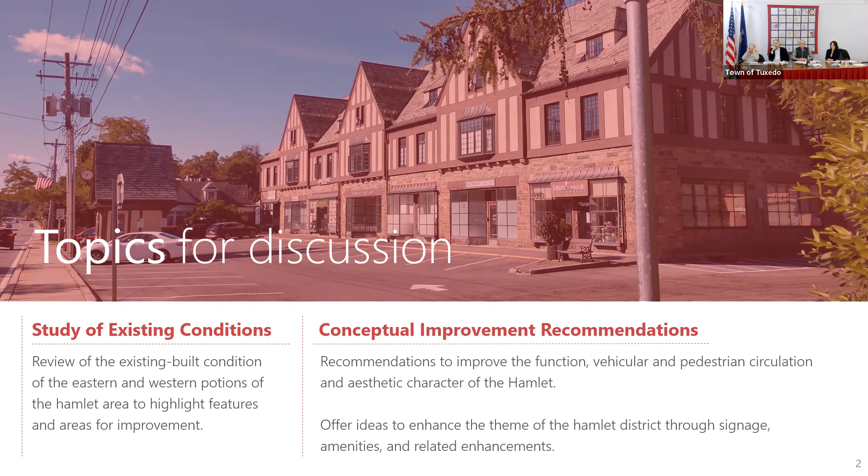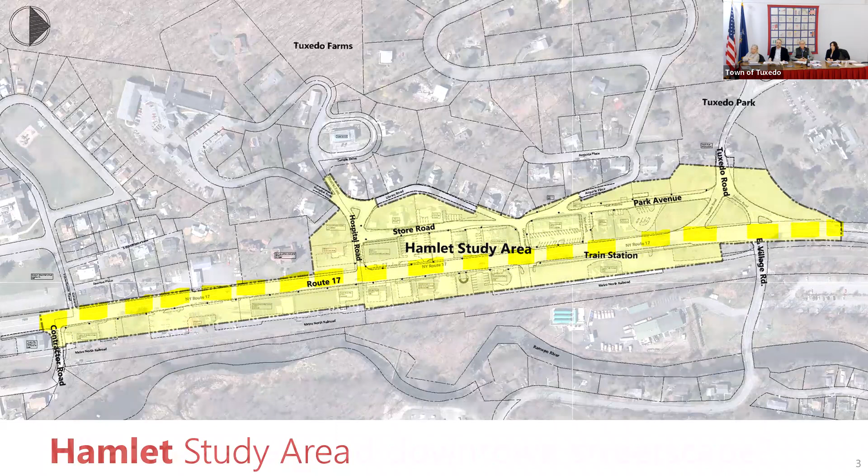What just came up on the screen a moment ago is actually Route 17's corridor, which runs down the central spine of the district, just so for orientation purposes.

So what makes a good downtown streetscape? There are many different ingredients that go into that, such as sidewalks, public space, circulation, street furniture, aesthetic features, outdoor dining, signage, transit, and lighting, amongst others. All these features are important considerations when you look at a downtown streetscape, and you try to encourage these features to improve the function, aesthetics, and interest of the downtown corridor.

I think that's one thing we may be missing in our downtown—and I refer to it as our downtown because we like to take ownership of this overall scope—the downtown itself is a sort of polished gem in my mind. It has a lot of architectural interest. It has a substantial amount of traffic running through it, and I think that can be captured through features and improvements in your streetscape.

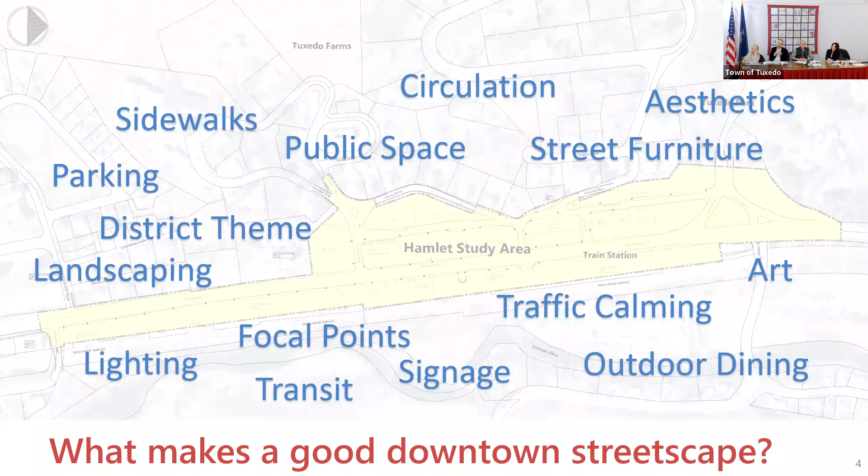Study of some of the existing conditions. This is a series of maps that I'll show you, highlighting various areas to help you understand what we were looking at and how those improvements... excuse me, I'm sorry. I'm trying to do this all from the larger screen because the smaller screen didn't work, but bear with me a second.

Okay, so first I'm going to zoom in on Park Avenue at its intersection with Tuxedo Road. What you're seeing here is the existing Park Avenue roadway, which is a sub-street, as I call it, of Route 17. As many of you know, you can actually circulate to many of your buildings along Route 17 without actually having to go onto Route 17. We became aware of that, and it became a substantial feature that I think you can enhance in your downtown.

Because Route 17 has its limitations as to traffic and volume of circulation that occurs in that area, what we're offering tonight is ways to improve Park Avenue as well as Store Road as other sub-streets of your downtown area. That allows for greater circulation and movement within the downtown, and ways of getting around instead of always having to go out to Route 17 for circulation, at least in that westerly portion of the district.

What you're seeing on the right-hand side is Tuxedo Road and its intersection. We identified some of the features—obviously there's a culvert coming from Tuxedo Park itself down through towards Route 17, eventually making its way to the Ramapo River. Vehicular circulation currently is utilizing Park Avenue.

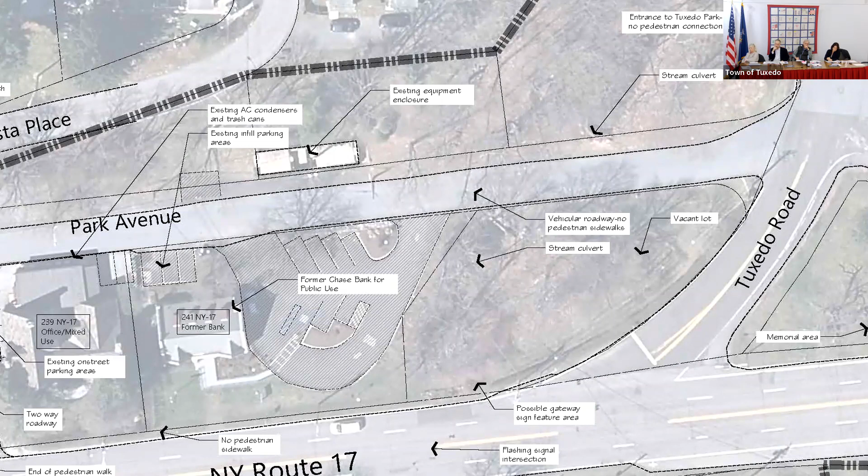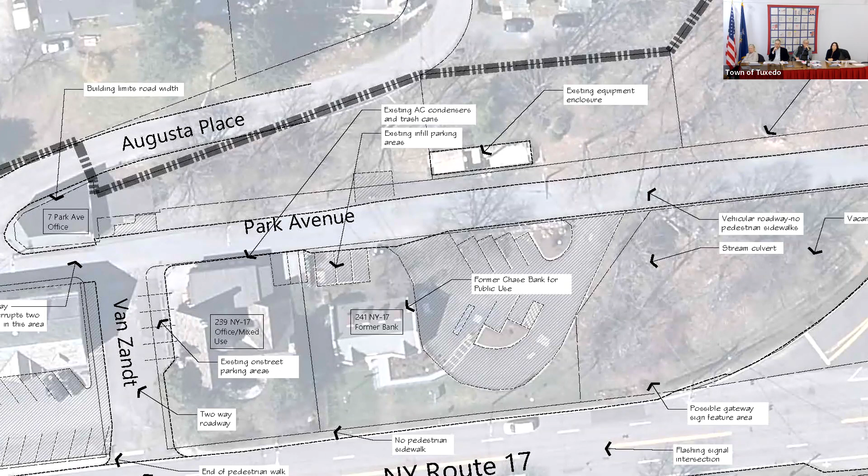I'm now moving south along Park Avenue to show some of the other intersecting streets—we have Van Zandt, and then Augusta Place. As I mentioned a moment ago, and I'm going to move my mouse to approximately the location, you have here where two existing buildings are in close proximity to one another, creating virtually a one-way driveway. That one-way driveway—there's no way of changing that because of the physical limitations in that area, with the exception of adjacent building improvements.

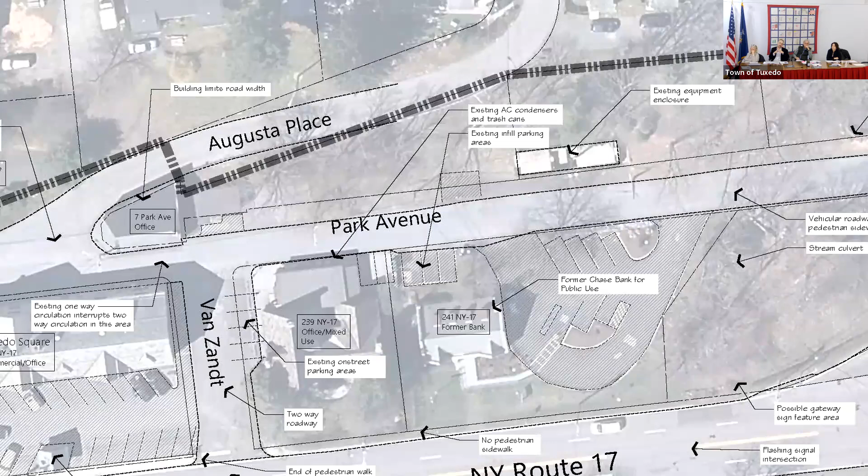Instead of recommending anything so drastic, what we're looking at, and what you'll see in some of the concepts we pursued, was ways to work with that and to realize that up to Van Zandt, Park Avenue may be a one-way circulation aisle, but at Van Zandt itself it's already an existing two-way circulation aisle, providing access to properties to the south. You have Tuxedo Square, and then circulation to Park Avenue itself. We look to maintain that two-way circulation and try to enhance it along Van Zandt.

That choke point at Augusta Place is also complicated by Augusta Place coming down to Park Avenue in a non-90-degree circulation pattern. That creates a confusing intersection for those new to the area, especially trying to get to Tuxedo Square. Say you turn at the light at Route 17 south of this image, then turn towards Augusta Place - it becomes a question of which way to go and who has the right of way. I think that can be improved through striping and other opportunities in that area.

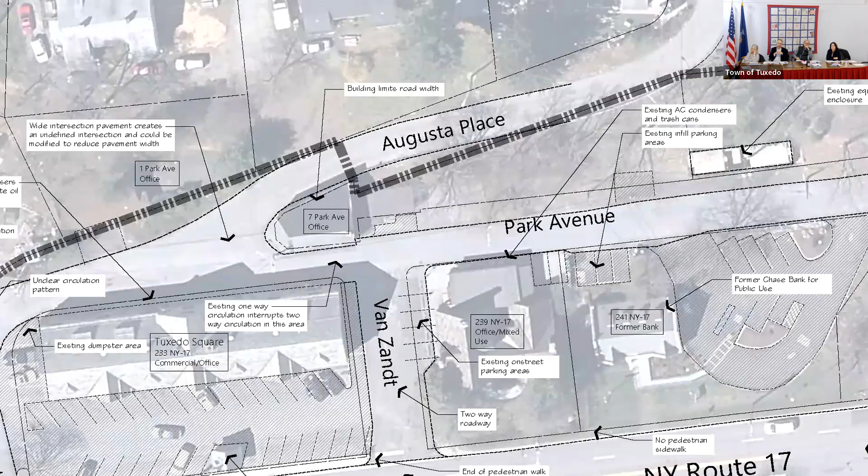We also have areas to the back of Tuxedo Square - you have your AC condensers and waste containers for the function of the overall building. The building has been positioned this way for many years, so there's only so many ways to make improvements to that area to allow vehicular circulation, thinking about the general public coming to businesses in the future, and looking at ways to aesthetically enhance those back areas of buildings.

You also have Library Road intersecting with Augusta Place, and as Library Road curves towards the south, that intersection itself is rather large and undefined. I think with striping and some minor improvements to that intersection, we can make it much more attractive, as well as easy to understand for a newcomer to this area.

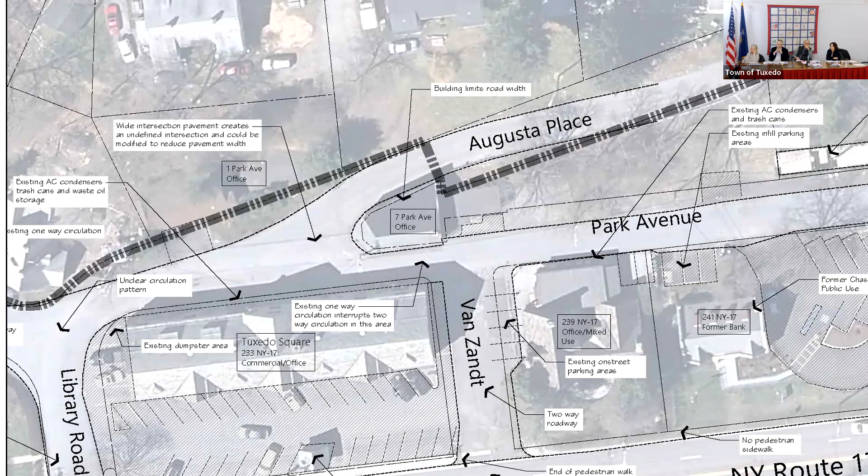Sorry, I'm just circulating around.

As you'll see on the same map, this is the existing conditions analysis. You obviously have at Library Road a full vehicular circulation signal. That provides two things - vehicular circulation at that point, but also an opportunity for pedestrians to cross the roadway. Route 17 is obvious to many here that it's very difficult to cross if you're not at the signals themselves, being a 4-lane roadway.

Van Zandt itself is unsignalized. You do have the flashing light further down the roadway, but there's no direct pedestrian connection to the train station other than at Library Road.

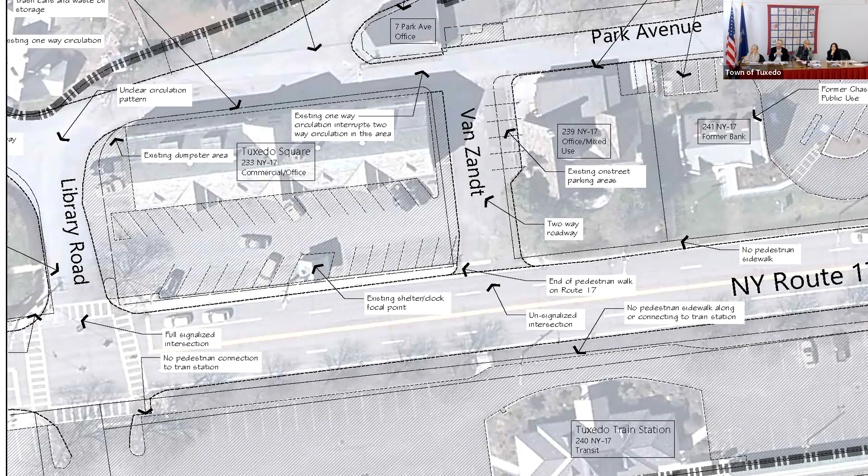We also looked at the train station itself, and what's interesting is that there are no sidewalks from Library Road's intersection to the front entrance and overall train station area - it's all vehicular circulation. We noticed the asphalt area for the parking lot is rather large; the aisle width itself is larger than it needs to be for a 90-degree circulation pattern.

What that offers is an opportunity. We're looking for ways to make small incremental improvements to improve circulation and enhance the overall downtown area. So that became apparent to us as we looked at the overall property.

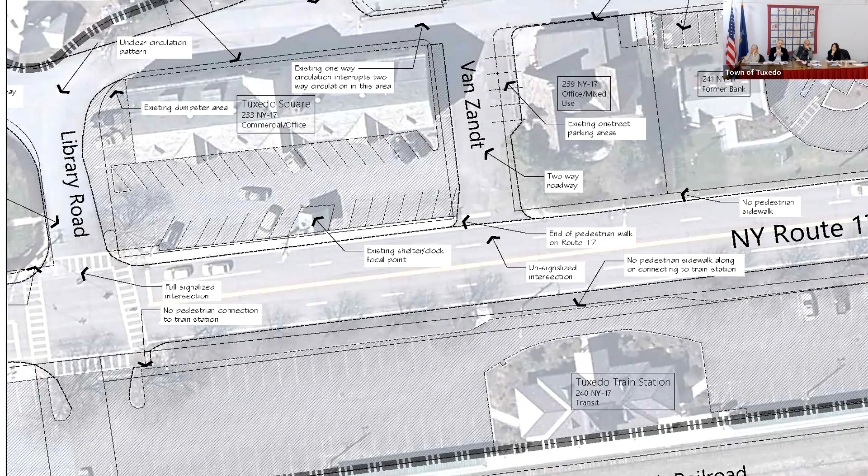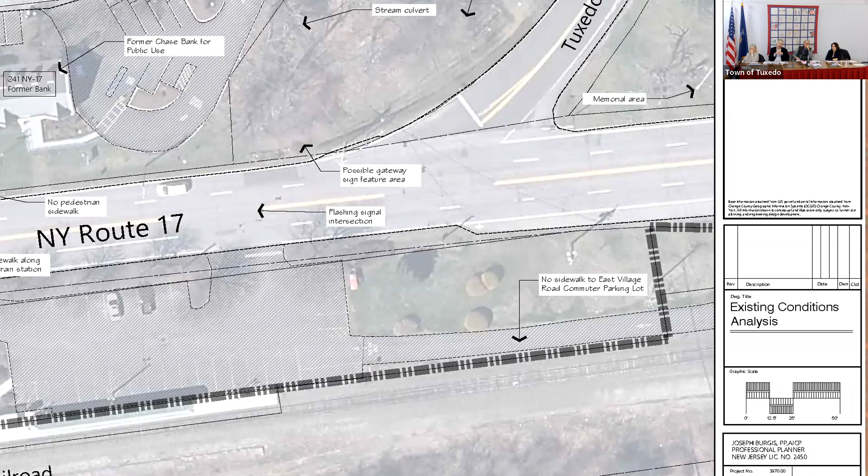In addition, looking further north at the drive that comes from the East Village Road area, there is no pedestrian connection from the park and ride facility - it's further down the hill. I think that's another opportunity we could look at to make that improvement as well.

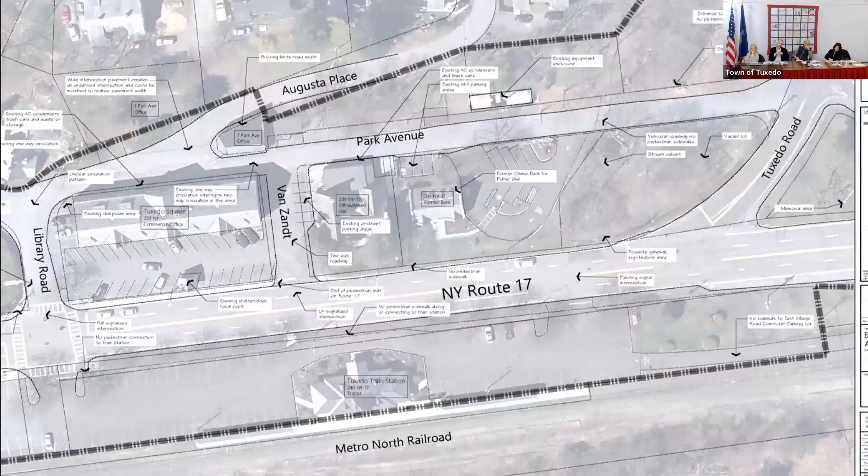What I've just advanced to is another existing conditions map that we prepared, and again I will look to zoom in on this as well.

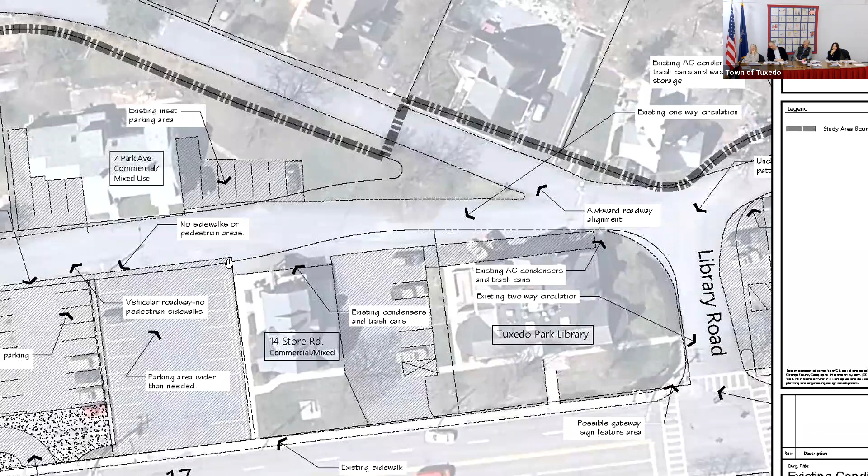You have existing air conditioning condensers, trash cans, things of that nature that also exist in this area. You have large open parking areas that dimensionally are larger than they need to be for some of the existing commercial properties. I think that represents a possible opportunity for the commercial properties themselves.

You have the intersection of Store Road and Hospital Road off to the left-hand side. It's a rather wide, undifferentiated intersection, probably evolved over time as the appropriate ways to address circulation. I think we have the opportunity to rethink those intersections and make improvements to them as well.

You have some wide driveway areas, and again, lack of pedestrian circulation in the back areas of the buildings. I think that's another opportunity that allows this interconnection between properties and buildings.

At the intersection of Hospital Road and Route 17, the exit area from the existing commercial property at that corner is again a large, undifferentiated intersection. I think that might also represent another opportunity.

What we also looked at in the downtown streetscape is ways to try to identify and highlight these intersections, to highlight that you're in a specific district. You do that through signage, landscaping, and pedestrian improvements that draw potential patrons to the area, so they can use it and possibly walk from business to business to frequent the storefronts. That was a main focus of what we tried to capture within the downtown area.

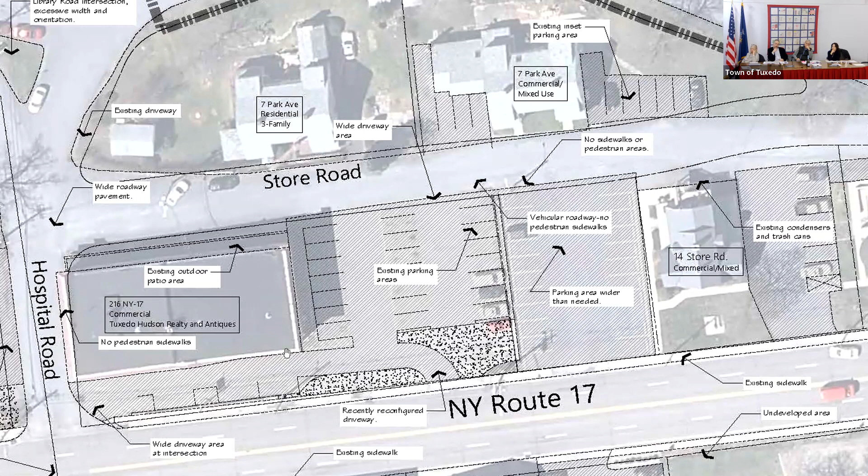On the easterly side of Route 17, you have existing sidewalk areas that have been recently improved. Unfortunately, there are no landscape features along that area. It's rather large sidewalks, all concrete, with no street trees.

We've had a lot of experience and success in downtowns where if you add street lights and street trees along your corridors, it adds a thematic element to your downtown area, so people know that they're entering a downtown. It doesn't feel so much like a highway. That's another thing we're looking to explore as well.

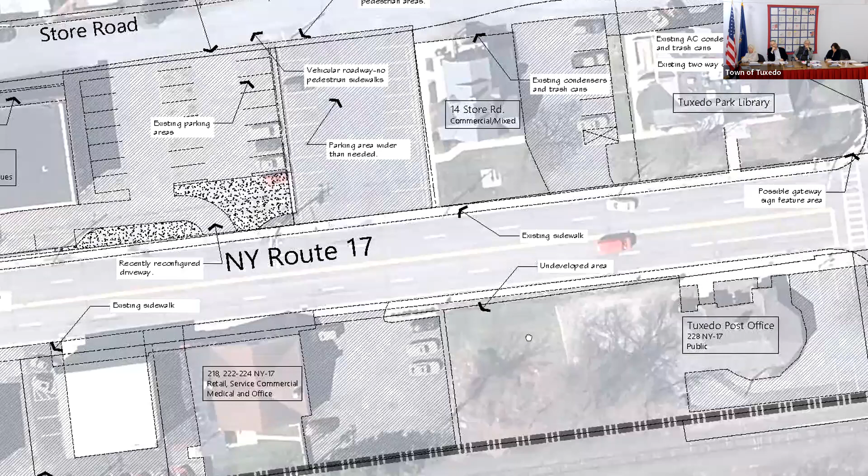Adjacent to the post office in this illustration, you see a large green space area. It's a rather unimproved area that I think represents a possible opportunity next to the post office - this is the post office to the right-hand side. So we identified that as well.

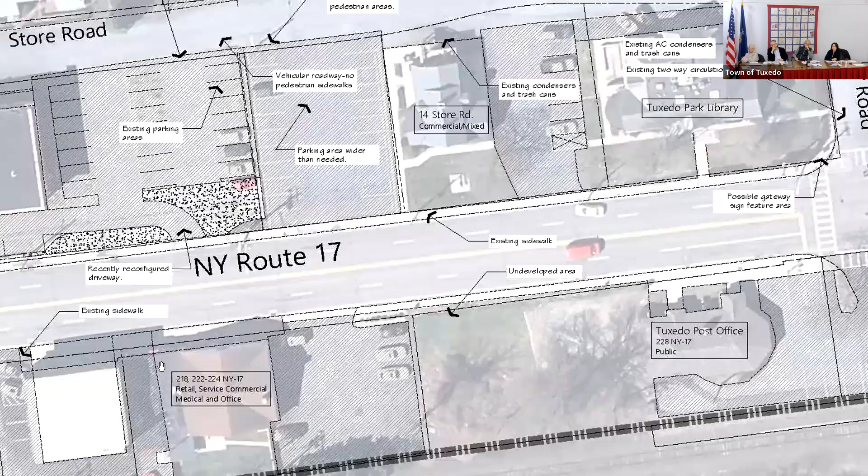Additionally, we looked at other adjacent buildings on the easterly side of Route 17 and noticed there are a lot of more light industrial, some warehousing type structures along that area. They represent some elements of commerce, but at the same time, some of the buildings could benefit from certain improvements. We looked at the existing warehouse at the opposite side of Hospital Road on the easterly side.

You have large blank walls where the windows have been filled in. You'll see some ideas in a moment of how to possibly treat that in a very simple way, capturing ideas of what other downtowns have done with walls such as that, to make them interesting and draw attention to your downtown, making it a point of interest for people passing through.

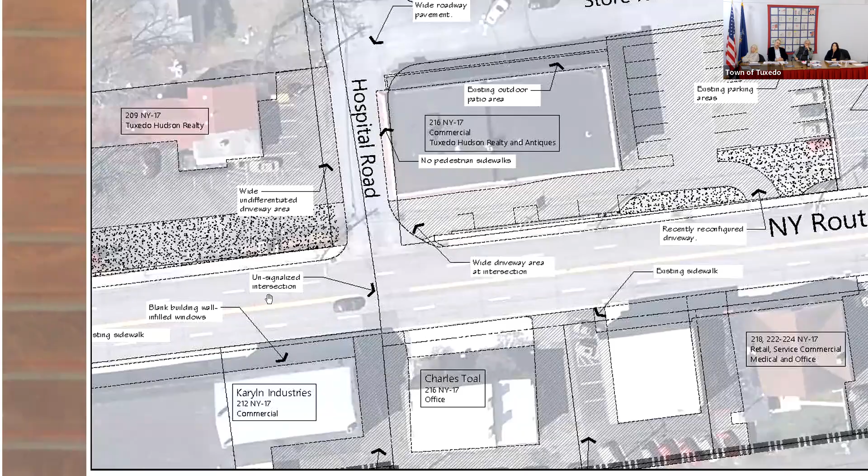I'm now transitioning further south, since part of our study area also included additional area to the east, towards the south. I wanted to show that at least in this location, this is an unsignalized intersection. As Ms. Murphy mentioned a moment ago, there's an opportunity to talk to DOT about another pedestrian crossing location here.

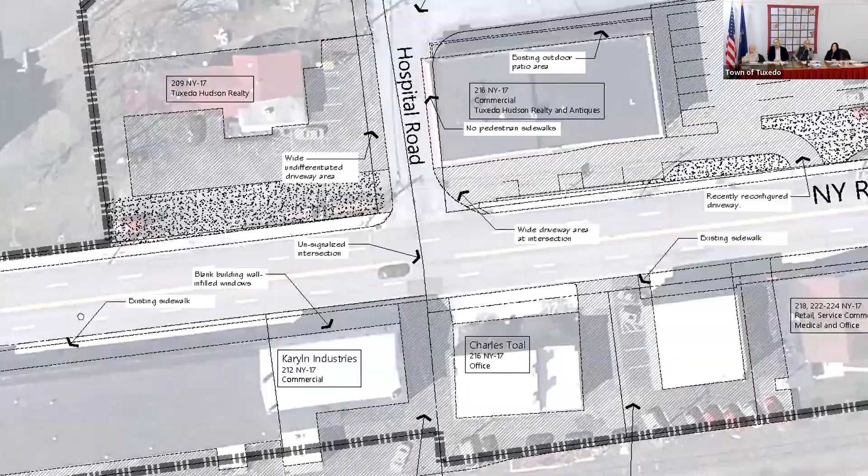We also looked at the sidewalks in the areas along adjacent properties towards the south. I'll point to a driveway that services some of the other adjacent businesses. Those driveways are available and open, but the existing sidewalks are somewhat interrupted by the driveways themselves.

What we try to do in downtown streetscapes that have been improved further to the north is use concrete or pavers at crossings of driveways. It allows pedestrians to feel safer walking along the streetscape, and lets vehicular drivers entering and exiting those driveways be aware that it's a pedestrian zone. You'll see some ideas to recommend improvements to those areas.

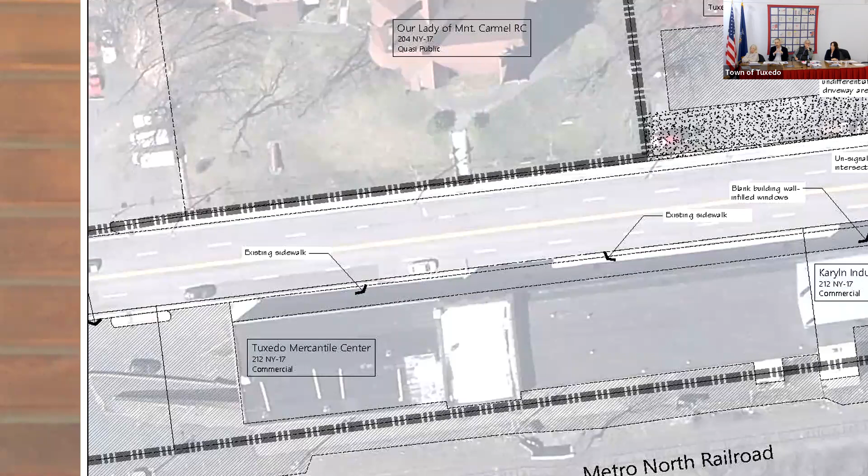What I just transitioned to is the southerly area of the downtown area, and I wanted to zoom in on this as well. Bear with me a quick second.

So what you're seeing here is where the businesses end their parking lots that exist in that area. There is a vacant portion of a lot along the streetscape, creating somewhat of what we call in the planning realm 'missing teeth.' That breaks up that element of streetscape along your corridor, and I think it's an opportunity for possible additional infill development. But of course, that all depends on economic improvements.

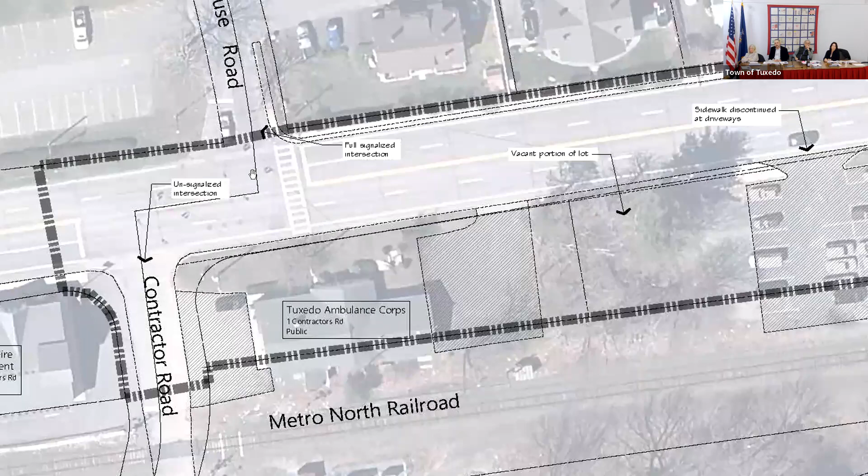You have your existing ambulance corps building, but also your existing signalized intersection in this area adjacent to Schoolhouse Road. That provides, again, another pedestrian connection on the opposite side of the streetscape.

We did take the study area to Contractor Road to see if there's any other opportunities for connectivity. I think there's a potential here where you have an undefined, large open driveway appropriate for ambulance vehicles coming in and out of the building, but maybe there's a need to connect a sidewalk and crosswalk area along that driveway.

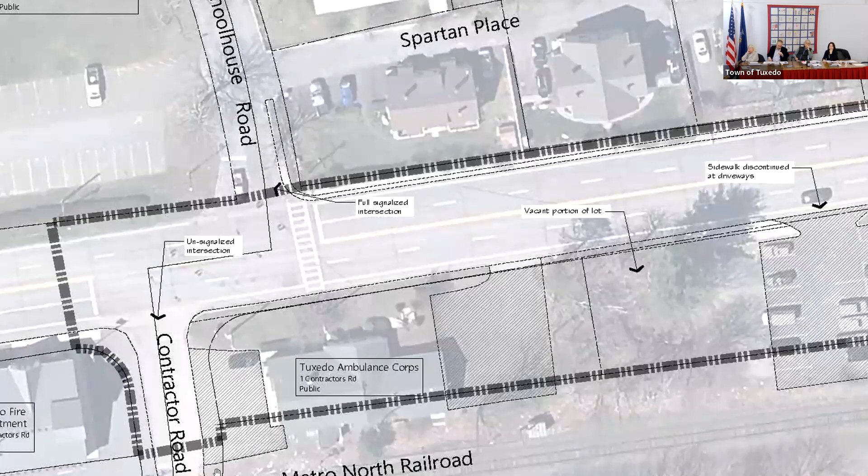So now we'll provide you with some of the conceptual improvements, from plan view. I'll go through some of these quickly since we have some simulations as well. I'll zoom in on some of the areas, but looking at Park Avenue again up in the north...

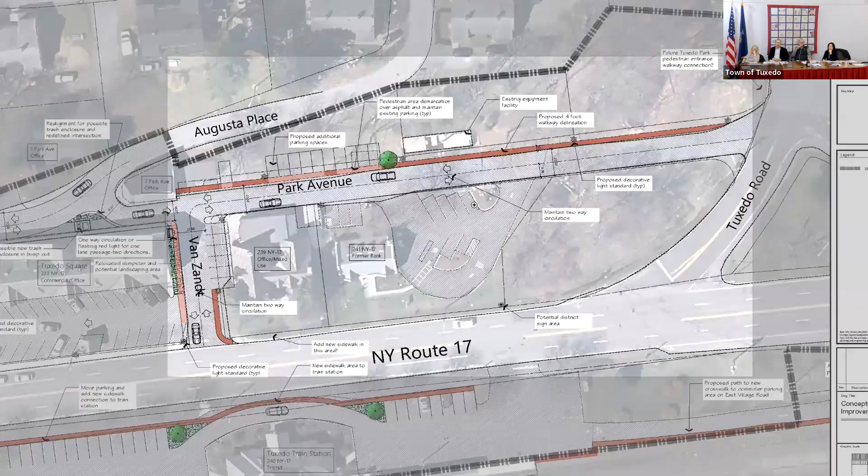What we looked at here is an overall width of about 26 feet for that roadway. I think there's an opportunity to create one lane in each direction, each about 11 or 12 feet wide, allowing for a 4-foot wide area of striped asphalt or possibly a formal sidewalk along Park Avenue. That provides connectivity to Tuxedo Park, and also a vehicular and possibly alternative access route for bicycles, so they can interconnect into the downtown area.

What you're seeing on the map as thematic elements of red and lighter red colors are areas that could be a striped area, an imprinted area with epoxy resin, or a formalized sidewalk. We wanted to identify those ideas so you can see where those opportunities could be.

In addition, we looked at adjacent property areas. There currently are some existing parking areas along Park Avenue that use Park Avenue for circulation. I think there are opportunities, if necessary, for additional parking spaces to be added in that area, recognizing that it is on adjacent property.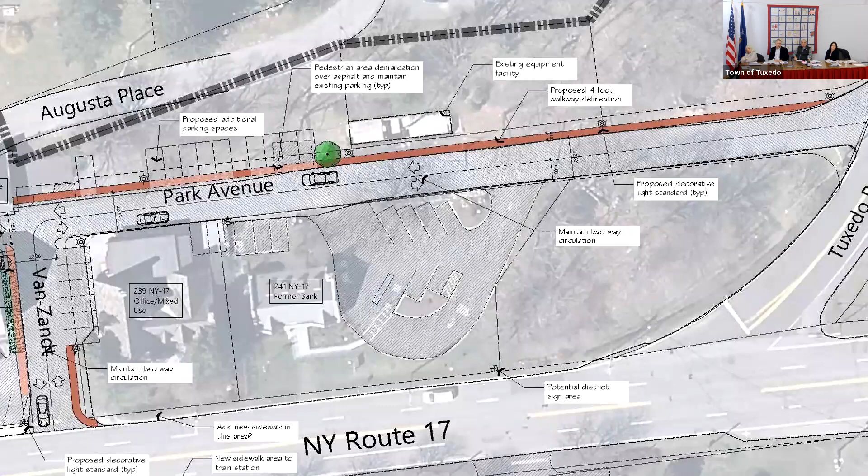On Van Zandt, I think there's an opportunity to improve the aesthetics, at least along the northerly side of the Tuxedo Square building. There are some areas with dumpsters located there that could be fenced in and enclosed, drawing attention away from them instead of drawing attention to them.

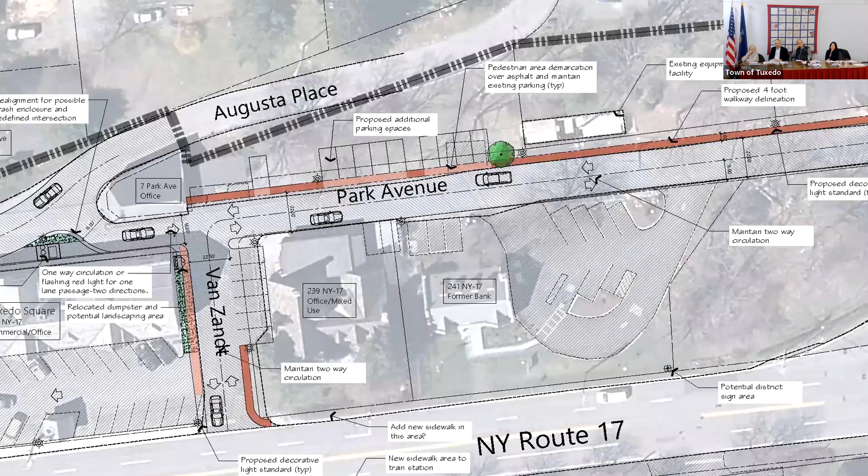Again, pedestrian circulation from Route 17 to the back areas of Park Avenue. We also looked at the intersection of Augusta Place and Park Avenue, circling that area with my mouse, and considered whether there's an opportunity to bump out the asphalt into that area.

That would be a way to try to enclose dumpsters and trash storage areas into an island, per se. That might be an area to help clean up some of the frontage along the back of Tuxedo Square.

In addition, allowing the circulation to be clarified coming down Augusta Place, allowing the flow of circulation to the intersection of Library Road to the south, but channelizing the driveway as a one-way circulation aisle to Park Avenue, still allowing that connectivity and working with the tight condition in that area. That represents an opportunity for us to explore.

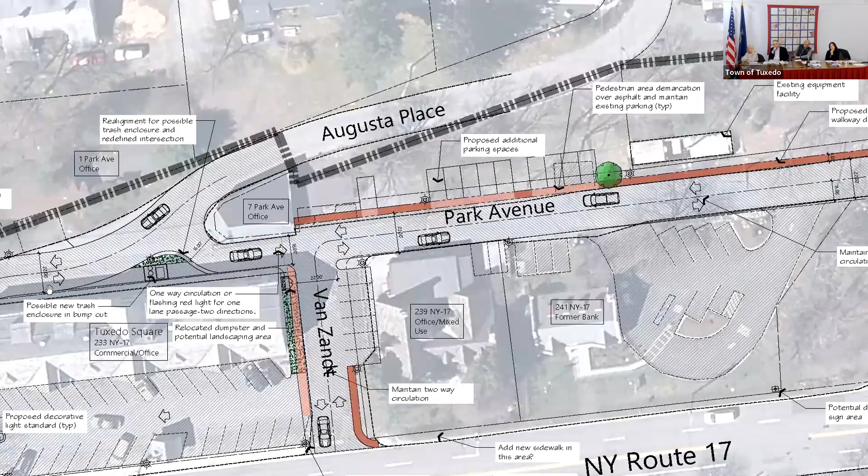In addition, the width of Augusta Place as it comes to the back of Tuxedo Square could be narrowed in some areas to improve landscaping and green space. That helps to aesthetically improve that back area so it doesn't feel like just an alleyway in back of a building.

We have some areas of dumpster enclosures that exist along the southerly portion of Tuxedo Square. There are additional areas for possible landscaping if we were to rechannelize the intersection of Library Road, again not taking away any existing parking spaces that currently occupy that area, but just trying to clean up and redefine the driveway aisle if at all possible.

Another thing we didn't quite illustrate on the plan, but I wanted to throw out there, is an opportunity. As a visitor to this area, coming from the south, to frequent for instance the convenience store in Tuxedo Square, I had to go from Library Road all the way around the building to come back around and use the parking spaces, not feeling comfortable making a left turn into Van Zandt.

Is there an opportunity to create either two-way circulation into Tuxedo Square or to redirect the circulation there? There's always two sides to that coin. If you redirect the circulation, you're sending everybody out Van Zandt to Route 17 and then around in a counterclockwise direction to Library Road to use the intersection. So there are many different ways to look at that, but that's the thinking I wanted to bring to the table: are we thinking of all these circulation patterns in the right manner?

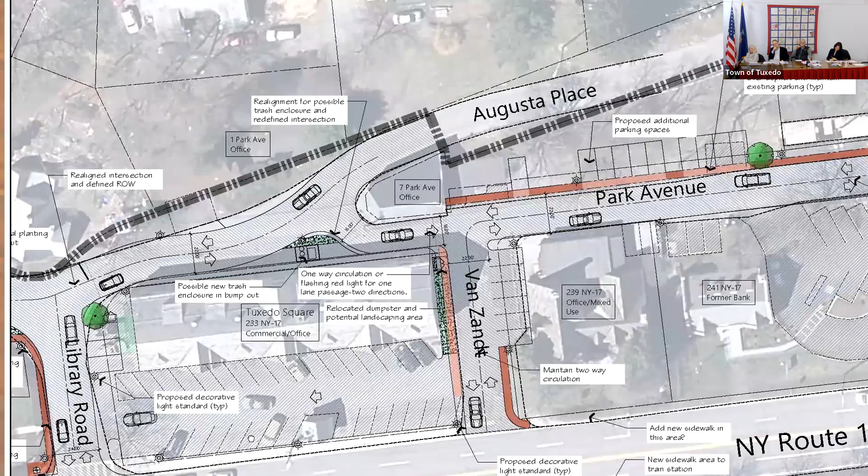In addition, as I mentioned earlier, we looked at the easterly side at the train station location. With some modifications, either through striping or reconfiguration of the existing parking, there's an opportunity to add a proposed walkway along the westerly side of that parking area as a way to connect pedestrians to the crossing at Library Road to the train station itself.

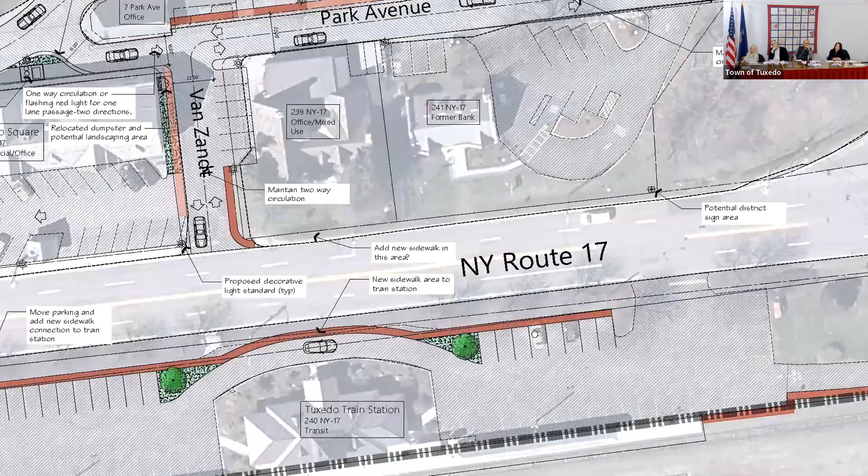I feel the access aisle or drop-off area at the train station is wide enough to allow for a one-way circulation pattern and the addition of a sidewalk area, because there is no sidewalk along this side of Route 17. That sidewalk could also be extended further north, bringing it down so pedestrians can connect to the main entrance area of the train station.

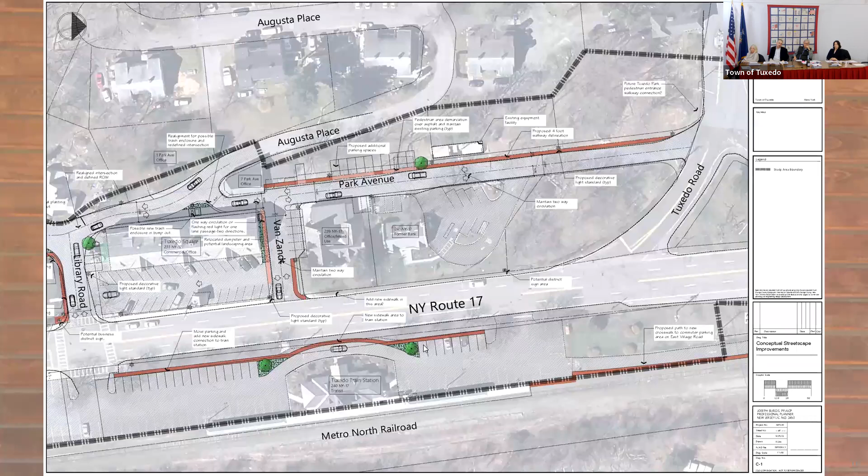So with that, that summarizes this page. I'll zoom out and go to the next series of images.

This now is another map showing an enlargement of the Store Road area. I'll zoom in on a portion so I can help you see some of the detail on the map.

This is the idea we had in mind for how we can possibly rethink Library Road, at least coming down from the south towards the north, giving a stop bar to stop that circulation, and allow Store Road to have a two-way circulation pattern to Library Road. That allows greater circulation to the parking areas and may also offer opportunities for sidewalk or imprinted crosswalk areas to be added along Store Road.

That allows for possibly additional on-street parallel parking spaces, much in the way it's used today, but formalized as parallel parking spaces.

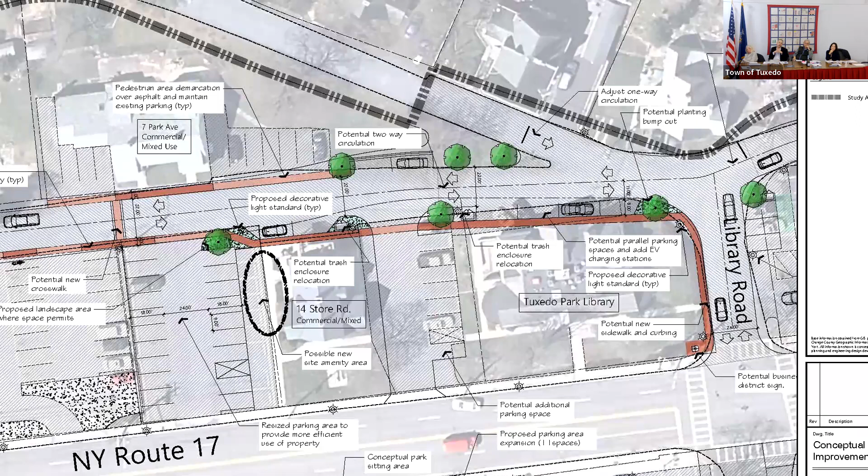Those parallel parking spaces could also be bumped out with landscaped islands to improve the streetscape condition and aesthetic. Those landscaped islands could also add additional decorative lighting to that streetscape corridor.

That decorative lighting provides for evening activities, as well as improves the time businesses can stay open, such as during the winter months, as we're experiencing now when the sun goes down so early.

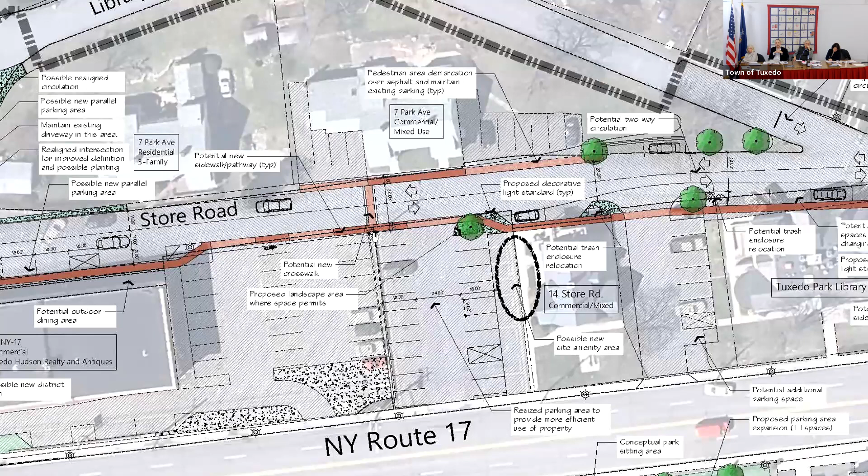In addition, we looked at ways to reconnect pedestrian connectivity - how can we connect to other businesses on either side of Store Road as well?

What you see here is the ability to extend those sidewalk areas further down towards Hospital Road. At Hospital Road, I thought that was an interesting intersection - if you are adding traffic and circulation onto Hospital Road, use it as an opportunity to create an intersection of interest.

In some downtowns, what's been done successfully by others is areas where you imprint and create a thematic intersection. That's done with either an epoxy coating of the intersection, or you could even look at reconfiguring it in some manner.

Could it be a rotary in some manner? That has to be further reviewed. But you can see here that helps to at least identify and create a point of interest for Store Road as well. So as a newcomer or a patron comes to some of the storefronts, they feel like Store Road isn't just a back road - it feels more like a streetscape.

So we're looking at ways to make these other sub-streets more interesting and usable for the businesses and downtown area. We also noticed this adjacent private property has a larger parking area with a large backup area.

If that's reconfigured to a minimum circulation aisle of 24 feet with 18-foot wide parking spaces, you have the ability to expand possibly an outdoor area or even some expansion to the adjacent commercial property, again allowing economic improvement for some of the properties themselves.

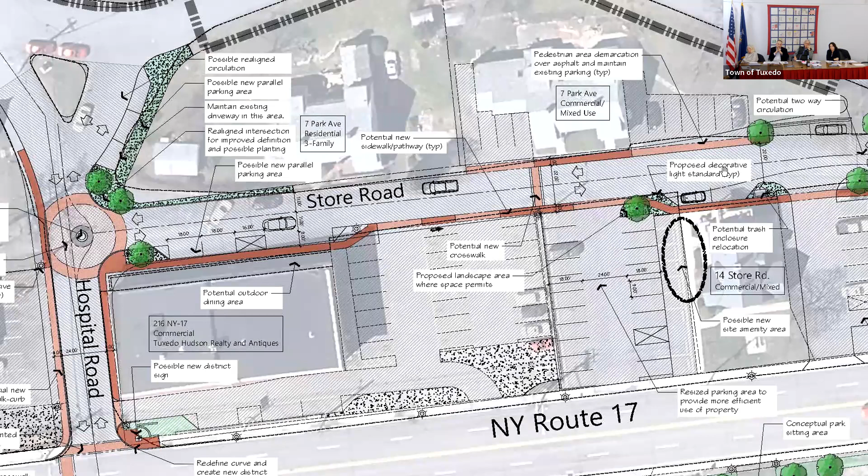What's also illustrated here as I pan towards Hospital Road's intersection with Route 17 is an opportunity with just some minor redefining of that driveway to create an entrance sign feature at that intersection.

It may require some retaining walls and features like that in order to create a level area. But with additional paving and appropriate detailing, that can really create an interesting point of view as you travel down Route 17, realizing that might be another entrance into your business district.

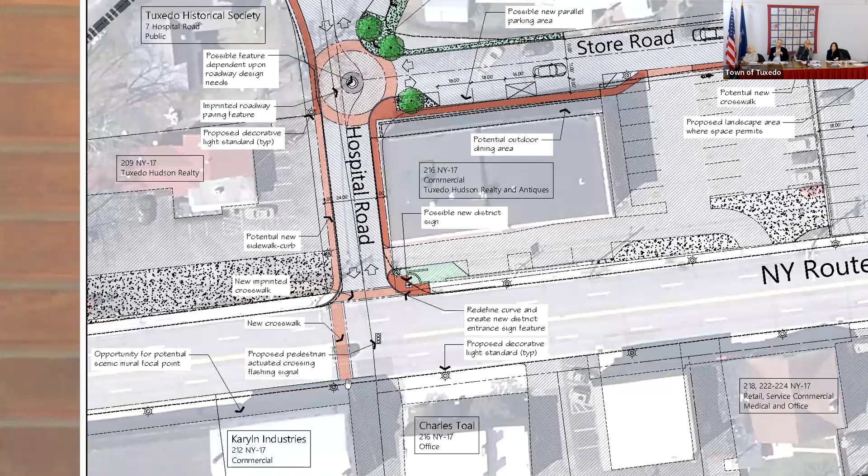In addition, you can see where we added the crosswalk idea across Route 17, with possibly a pedestrian activated signal like they have in Sloatsburg.

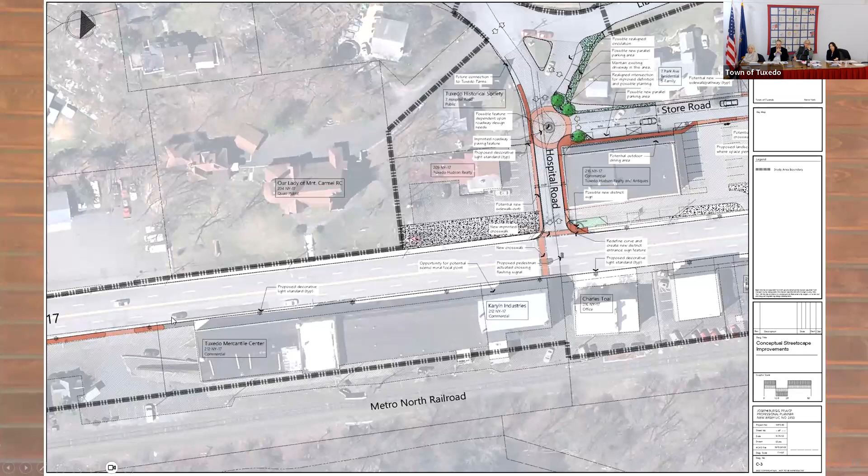And with that, I'll transition to the last page. This is generally a similar page, but you can see in the lower left-hand corner ideas of where we can extend the sidewalk across driveways in order to improve those sidewalk intersections.

You can also see further down towards the south where we've added the same patterning and details so it improves those intersections and crosswalk areas, as well as a potential crosswalk at Contractor Road, allowing greater circulation and connectivity to the areas to the south.

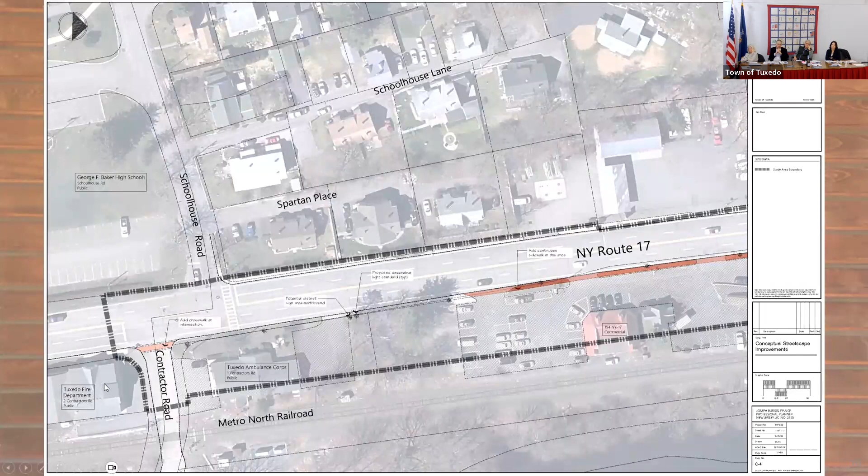Overall, with the concept sketches we've put together, what you're seeing here is additional public on-street parking areas, as well as potential off-street parking areas - 15 spaces on-street that could be captured by these improvements.

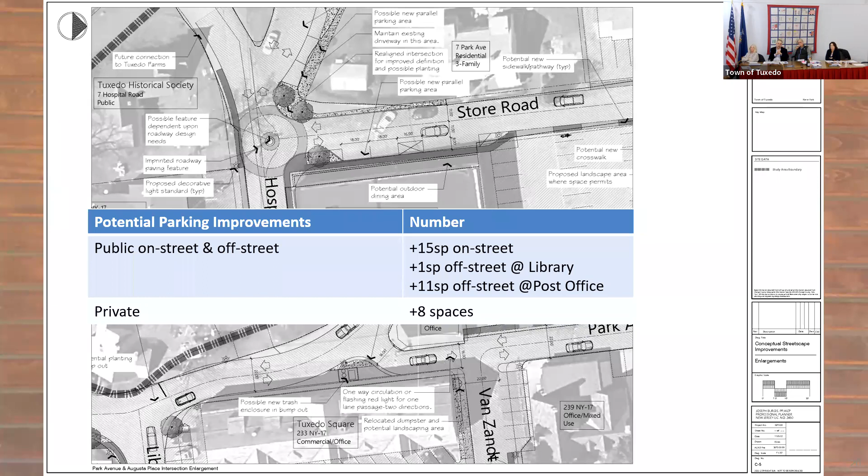In addition, you have one space added off-street and another off-street at the library itself, plus another 11 off-street parking spaces at the post office that could also be captured. I didn't quite focus on that area, but I can show you that in a moment. In addition, I've shown some possible additional parking spaces on adjacent private properties.

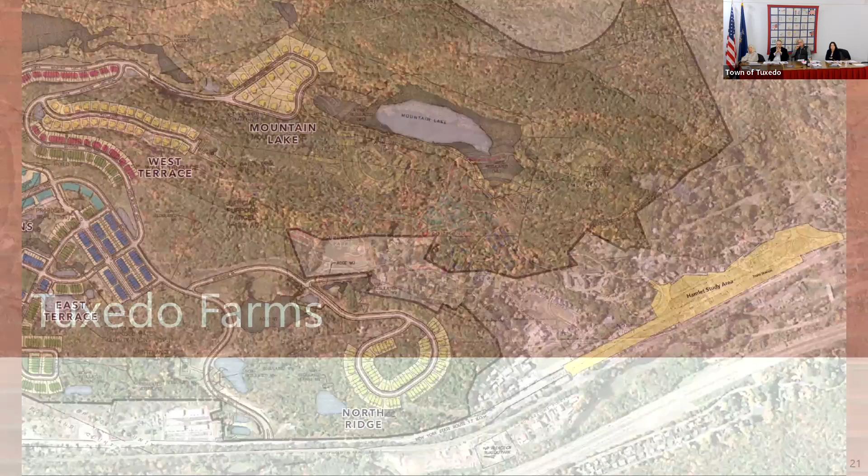We were also asked to look at Tuxedo Farms and its interface with the downtown area. Just so everybody has a reference, we downloaded the concept sketches prepared for the Tuxedo Farms area and overlaid them on an aerial photograph with the downtown hamlet area, to show that relationship between Tuxedo Farms and the hamlet.

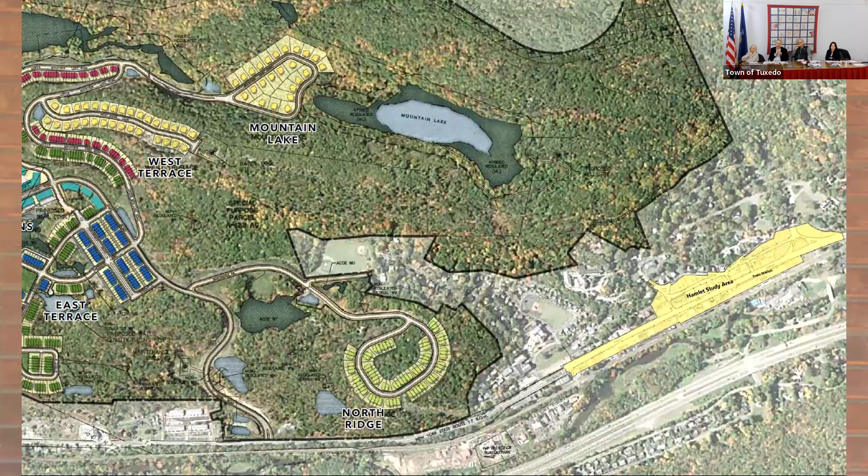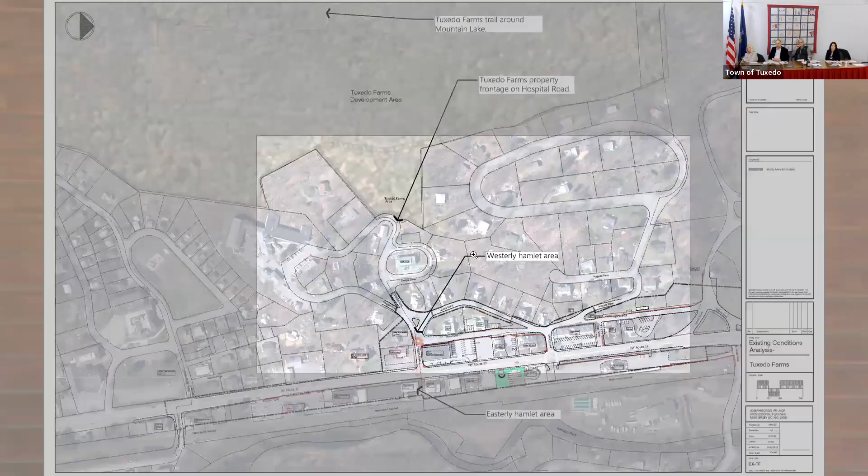We were charged with looking at opportunities, so we don't miss the chance to possibly provide a pedestrian connection between the hamlet and the overall Tuxedo Farms development. In this illustration, you'll see the connectivity here where we are right now, the town hall, which is located here, Hospital Road, and the area of Store Road I mentioned earlier.

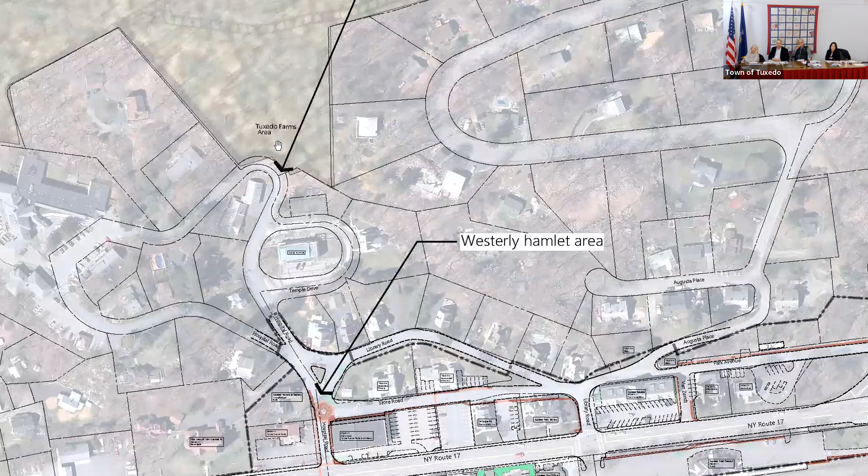Unfortunately for connectivity, the Tuxedo Farms frontage is behind the municipal town hall. It is an area we could connect to, and we could provide some connectivity through sidewalk improvements past the town hall, but it would be more like an informal trail that may connect to Tuxedo Farms.

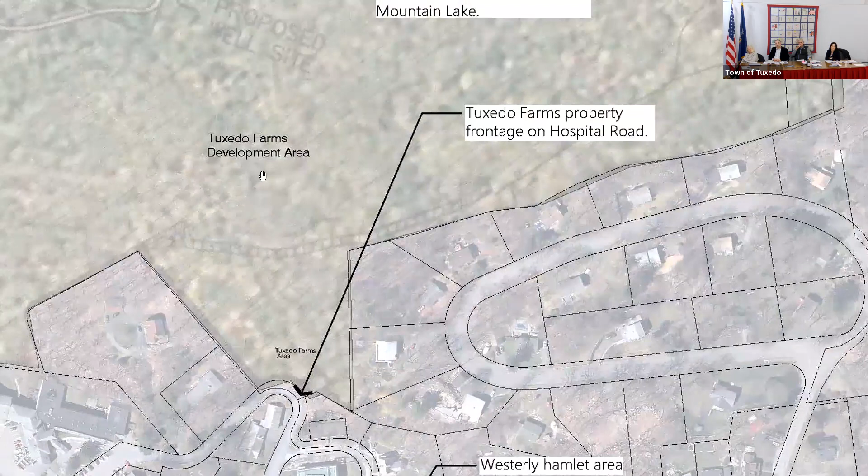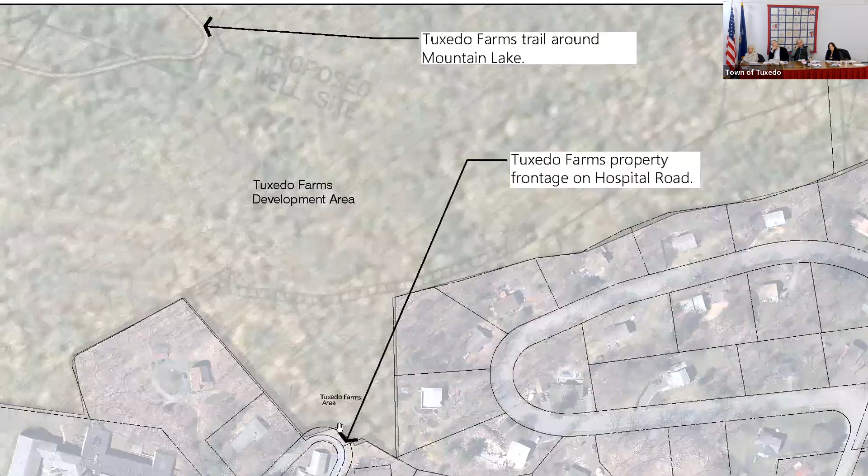As I pan to the west, the current trail system being anticipated is up in this upper area of the image, going around Mountain Lake. That's something anticipated, but there could be a spur of that trail brought in, possibly with switchbacks, because there is a grade change in this area down to the Tuxedo Hamlet area towards the east. So that's another potential opportunity we could look at.

This is another illustration showing the grade change between the Hamlet area, down in the lower portion of the image, going around the Tuxedo Town Hall, and that frontage where the grade change occurs up to the Mountain Lake area. You can see the Tuxedo Farms West Terrace area is approximately up here. I used a Google Earth image to show the topographic relief and relationship to the Hamlet area. So while it couldn't be a formalized sidewalk area, it may be an opportunity for trail connectivity, so we wouldn't miss that chance to allow at least some connection to the downtown area.

Now going back to downtown and some of the streetscape areas, we wanted to show some visual simulations, taking photographs and overlaying what it might look like with certain improvements. This is looking north on Park Avenue, showing the existing conditions, the drive condition, the roadway width, and some adjacent parking areas.

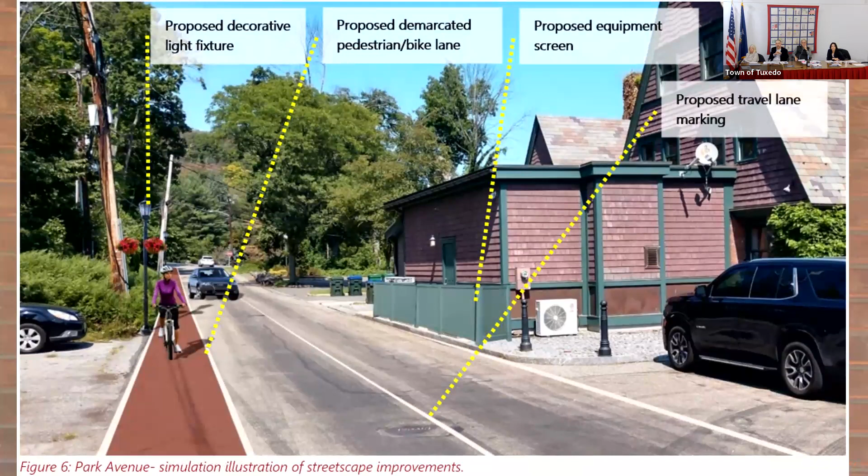You also have the back of house or back of building conditions - air conditioners, trash cans, trash receptacles - all appropriate things that need to be thought about, but could there be ways through improvements to offer screening around those features? Through screening and other roadway improvements, there's the ability to add pedestrian realm or possible bike lanes along Park Avenue, as well as streetlights to add aesthetics to that streetscape area. These simple techniques or tools could go a long way to improve the visual image and functionality of those areas.

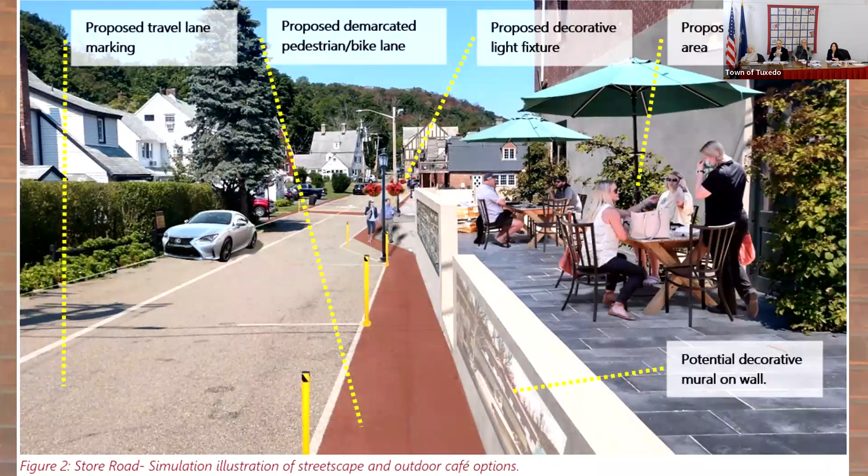Another simulation we did was further down on Store Road - is there an opportunity to offer on-street parking, possibly two-way circulation aisles, pedestrian realm sidewalk areas, and utilize the existing walls for possible murals and decorative features to enhance the streetscape? In addition, add decorative streetlights for amenities along the streetscape. Is there an opportunity in the back of the building to add outdoor dining? That's another possible way to add activity and vibrancy to the downtown.

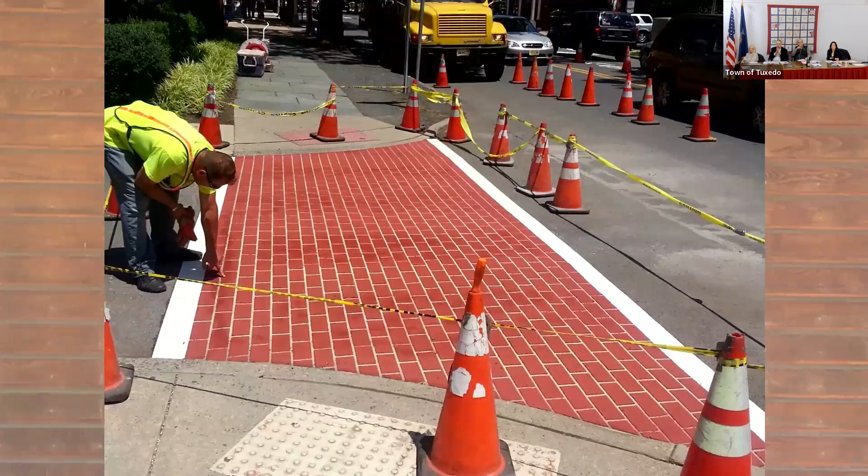In addition, the conceptual report shows some streetscape details. You have many nice historic features downtown that I think we can capture on. What I'm showing here is from downtown Princeton, where they've used imprint material to highlight crosswalks, showing how the roadway itself can be painted and even imprinted with material that cars can drive over and snow plows can plow over. This is accepted by New York DOT as an appropriate treatment over asphalt surfaces, just to show how it's been applied and utilized in other locations.

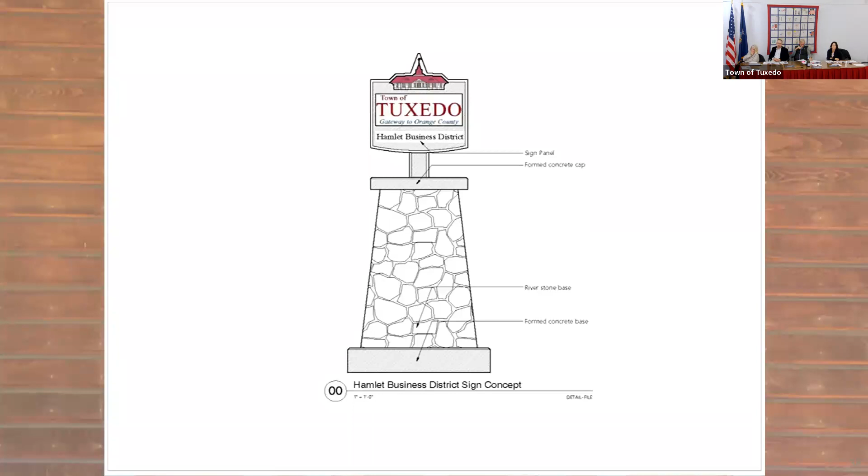A quick idea of how we could do some signage. Again, I tried to capture on the existing train station some of the historic architectural features you have, identifying it as the gateway of Orange County - I know that's part of your masthead - as well as the Hamlet Business District. This is just a quick illustration of how that could look, utilizing stone that also reflects form from other building materials that exist within the downtown, trying to reinforce that historic aspect.

What I would recommend is changing from high-intensity discharge lamps that are out there now to LEDs, improving efficiency, but utilizing LED fixtures that also have a better color rendering index with more of a historic quality - not the bright white everybody knows as an LED fixture, but something more of a warmer coloration at night, so it reflects and complements the downtown historic district.

Thank you for your patience - this really summarizes some of the ideas we've been exploring. Again, this is a conceptual plan, so we're open to questions and recommendations on ways to improve it. As mentioned in the earlier presentation, this is part of the streetscape improvements, and there are other features that will be looked at in the downtown area, but it's meant to provide an opening idea for how to make improvements in very cost-effective ways. Thank you very much for your time.